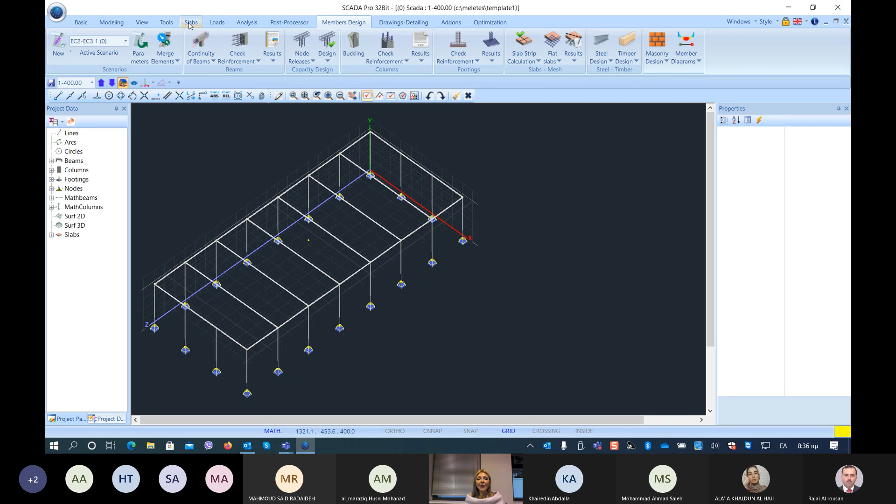In order to receive the reinforcement of the slabs, we absolutely need to have the strips. So I go to the slabs and check if I have the strips. You remember I have one-direction slabs, so I insert this strip in the Z direction. So I am ready. I go back to members design and now I open parameters.

Here you can see a window. There are a lot of tabs inside, but the most important thing is to select the combinations. You remember that I could have a lot of analyses, but the combinations tell me what results I will keep for my design.

In this case I will select the static combinations. You see here there is an error in the combination file - it's not an error, the software needs the seismic loads. So in case there are no seismic actions, you will see this message. In your case you don't care about this, so you just say okay, and you have the only one combination that you have for your exercise.

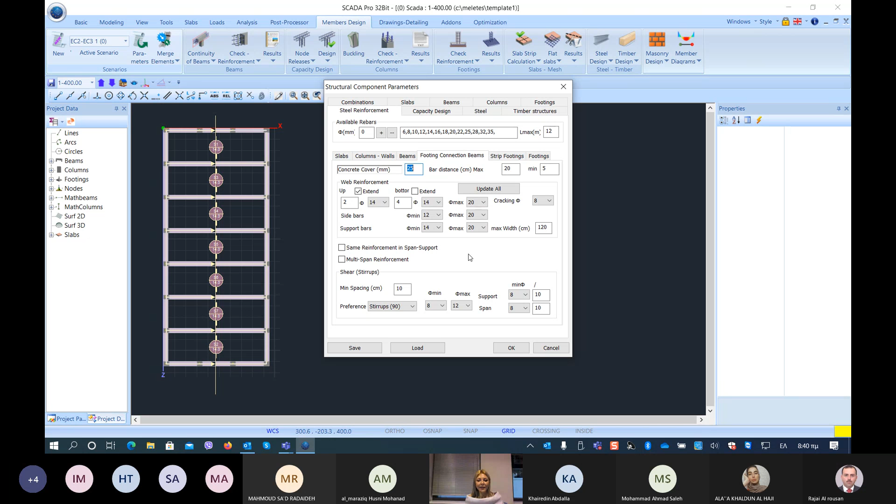So this is the selection of the bars that the program will calculate and insert inside the elements.

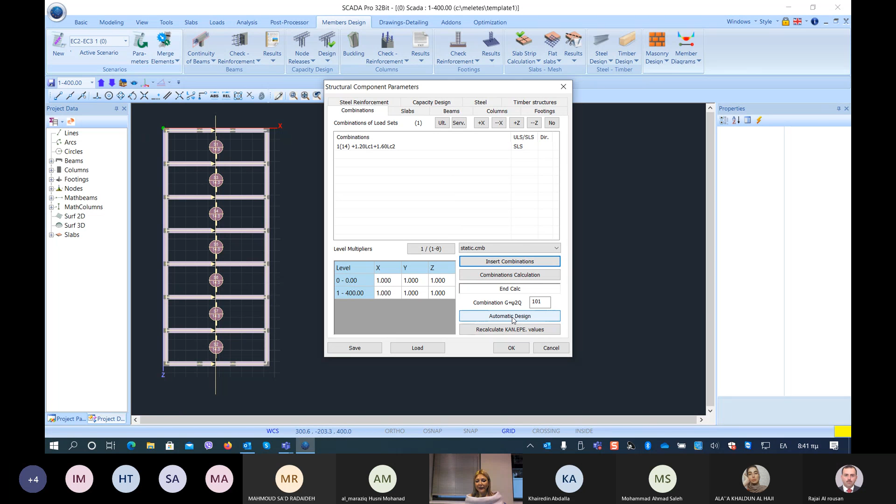So let's go back. For us, the important thing is to calculate the combinations, and then there is a magic command called automatic design. If I click automatic design, the software will do all the steps by default, by itself, without the need to do these things manually. So I can click automatic design, or I can come here and do all the steps manually. What are the steps that the command does with the automatic design?

The first thing is to find the continuity of the beams. What is continuity? This is a beam, but here there is a continuous beam, so the reinforcement should consider this continuity. That's why I need to say overall continuity of beams for this level or for all the construction, but I have only one level, so it's okay to click here. You will receive this square design in red that tells you these are the continuity.

After this, it's possible to do the check reinforcement. Otherwise, if I click check reinforcement without the continuity, the software will give me a warning. So continuity is the first thing, reinforcement check the second. Single or overall, I will select overall for the level and click OK.

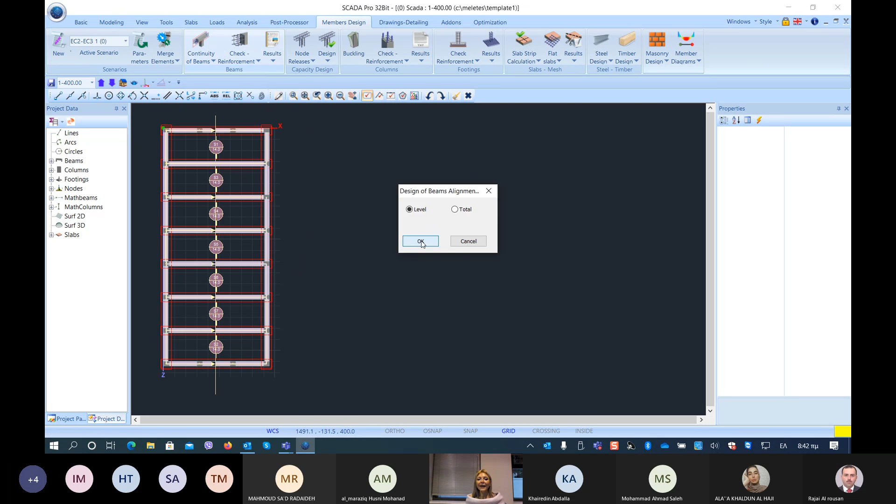And now you see the software doing all the calculations according to Eurocode 2 in order to insert the reinforcement inside the beams, and it gives me the information in color. So when I see green or blue for the beams, I am happy because this means all the checks are passed, are okay, and the software could find an appropriate reinforcement to insert inside the beams.

But let me show you what the software did. I go on the results and I can see results, exploration. Let me click results and I click inside the member of the beam, and now you see the results in order of calculations. As you see here, it calculates the reinforcement.

This is the required reinforcement, and this is the final reinforcement. So these are all the things written, and you see the bars that it used, and also here you can see the calculations.

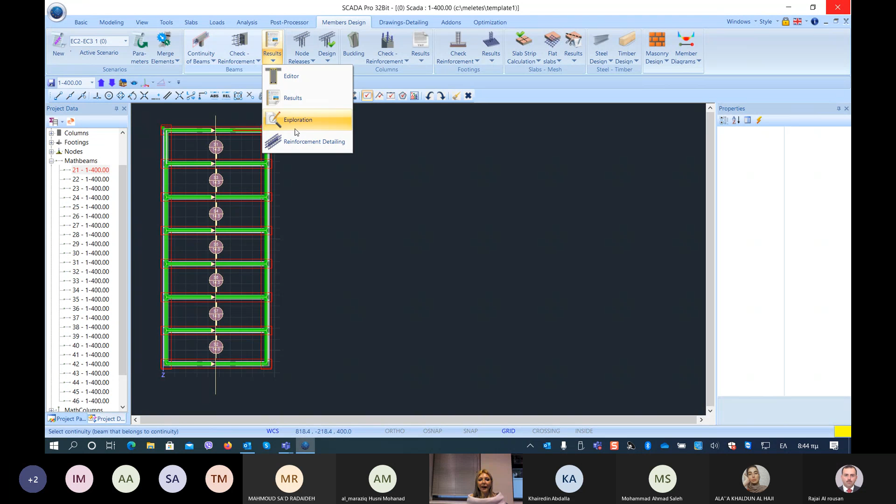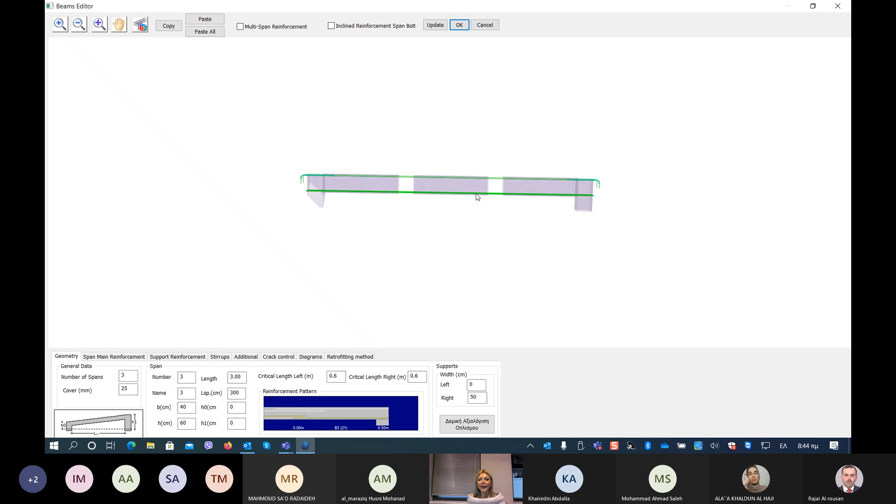But if I go into the reinforcement detailing and click on this mathematical element, I will see the reinforcement inside this continuity of beams. So here I can also have the opportunity to see it this way, how the reinforcement is inside, and I can see it also in the 2D view, and you see the reinforcement inside.

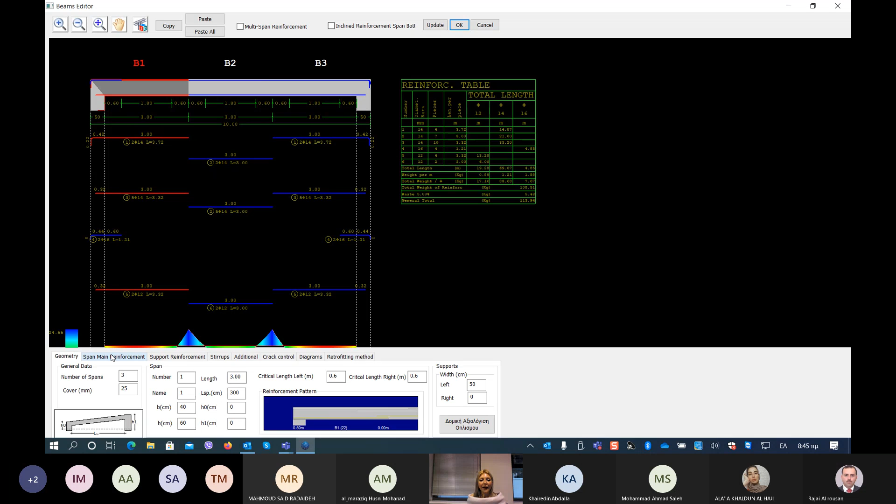So here it's something that I can manage. For example, I click here in this span, and if I click to see inside the span, I see the software inserts 2 bars with diameter 16 for the top and 12 for the bottom part.

It calculates, you see the anchorage here, according to Eurocode 2. So according to the bar, according to whether the reinforcement is top or bottom, it calculates the length of the anchorage.

And here you can see the required reinforcement in meter square, in centimeter square, and the placed one.

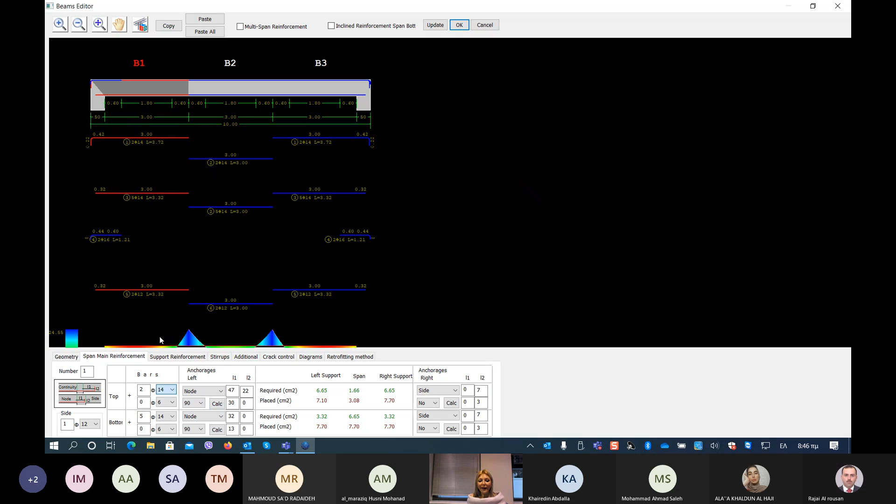And if I select, for example, two bars of diameter 12, you will see here that it becomes red because the placed is less than the required. So you see here that the software found the diameter that needs to be inserted in order to have this placed centimeter square more than the required.

And this is for the main reinforcement, and you can see also for the support reinforcement. So if I click here, I see that I have two more bars of 16 diameter that were necessary for this support part. And the same thing on the other side, if I click here, it becomes red, and now I see this part.

And this is how it works. I can see also the stirrups, and the stirrups are in the bottom. So here you can see also the details of the reinforcement. You see the bars in the bottom, on the top, and you see the stirrups around.

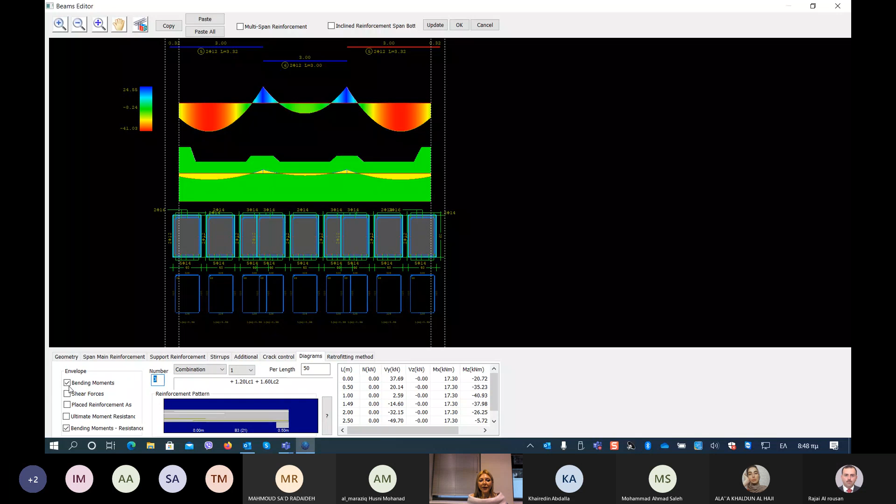And also here you can see the diagrams. So if I come here on the diagrams, I can select to see the bending moments, the shear forces. I can see, for example, the placed reinforcement and the ultimate moments, for example.

So I have the opportunity to check all the diagrams of the envelope. In this case, you have only one combination, so the envelope is the same as combination one. Otherwise, I could select another combination, or you can see it by load cases. So you have the dead and the live loads, so you can select to see for the live loads only. And here you can see that for each cut, it's like cutting the beam every 50 centimeters, and you see for each cut what is the shear, the moment for only the live loads, for the dead loads, or for the combination of them. So this is how it works.

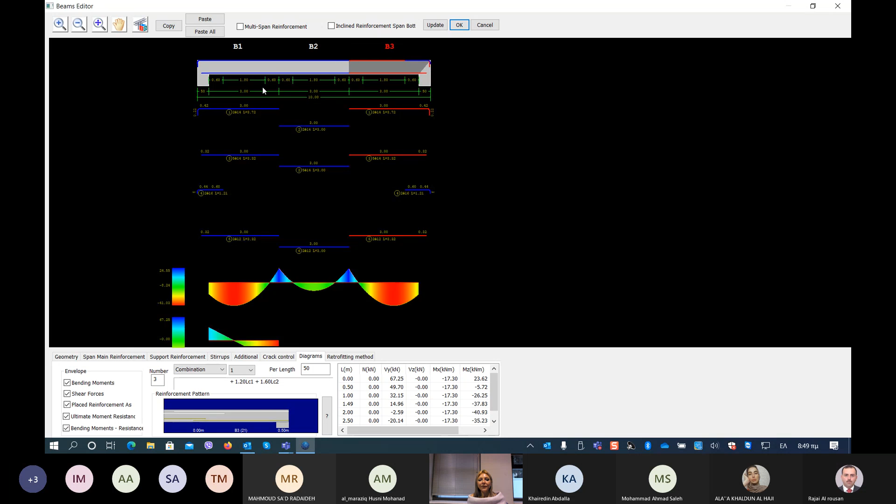And also I would like to show you that you have the possibility to click multi-span reinforcement. In this case, the software considers only one bar to cover all the needs of the continuity of the beam. Otherwise, you see that I have pieces of bars. In this case, I have one only bar for all the continuity. So this is also what you will receive in the designs.

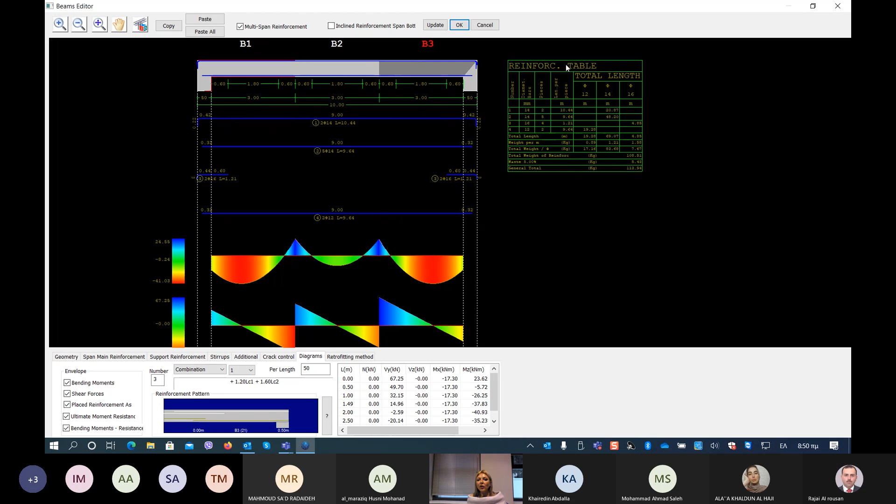Here you can see also that there is a table. Let me make it a little bit bigger. There is a table that contains all the information of the reinforcement of the beams.

And the most important thing is that if I change something, this changes accordingly. So if I select, for example, to have another diameter, you see here it's automatically considered here. So these are the information that you can take inside this editor, this reinforcement editor.

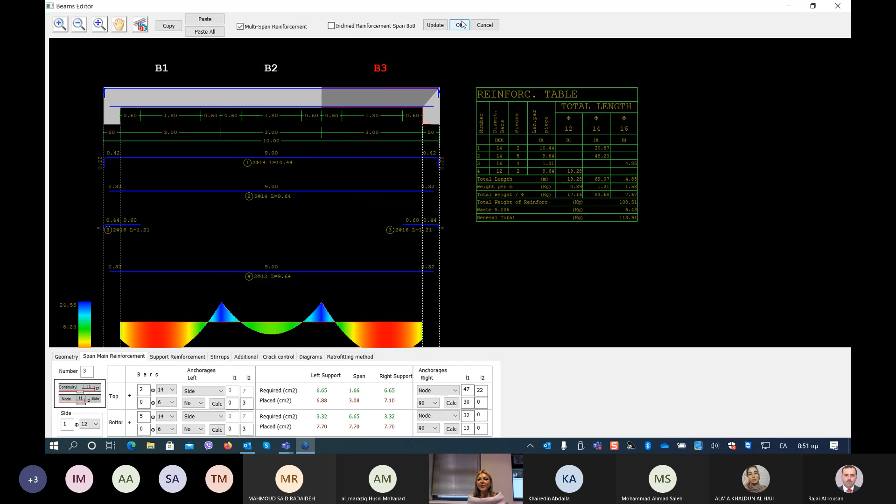I click OK in order to keep the changes, or I can just click cancel in order to leave what I had previously. And you can do it by clicking here on reinforcement detailing, or you can just come here near with the mouse, right click, and here you can see the detailing.

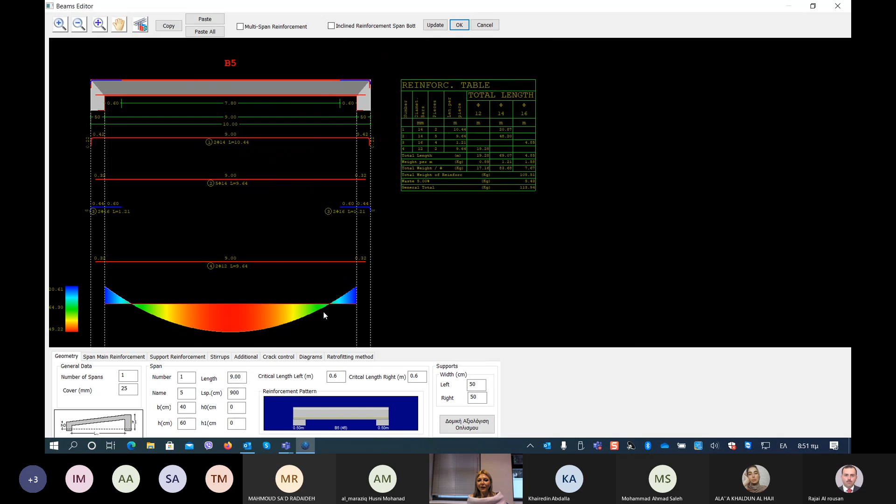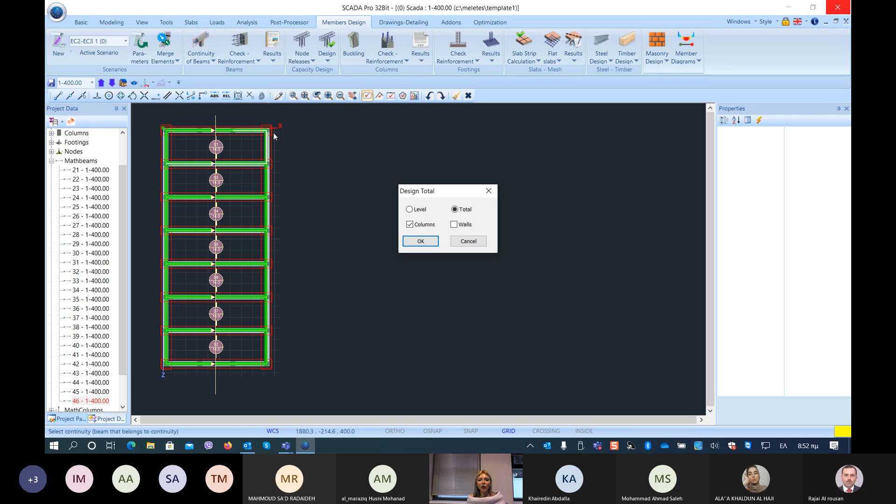Let's go on with the columns checks. So I click here, overall, and here I see I can do the check per level, for all the structure. I can check columns and walls. Walls means that there are vertical elements like columns where the ratio between one direction and the other is more than 4. So in this case, I don't have walls because there are only 30 by 30 columns, and I click OK.

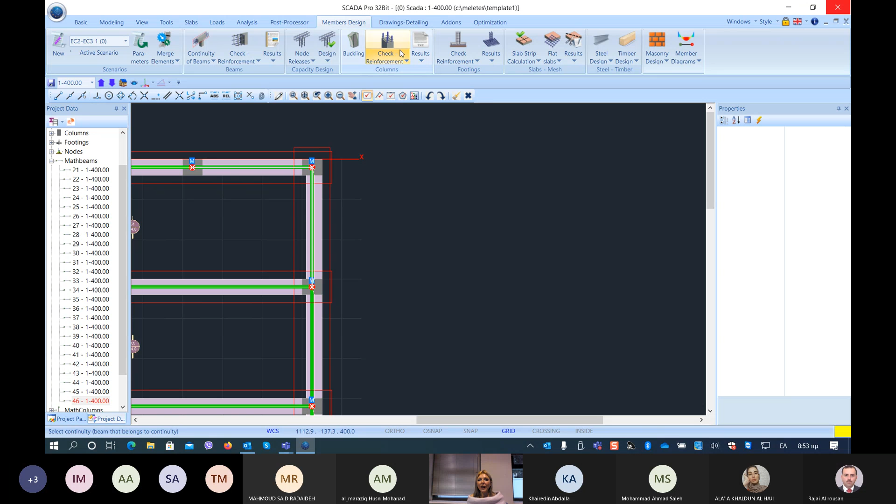And you see here that I have a lot of problems on my columns. Let me show you this thing. Why do I have these problems? I need to go check inside this column. So let me open the results, open this one, and check.

I have a problem because I need to run again. No, I have zero, that's why I have this problem. So let me go back to the analysis, because talking about things, maybe I need to run the static analysis again. I don't remember, I didn't run the analysis previously, so I need to run the analysis.

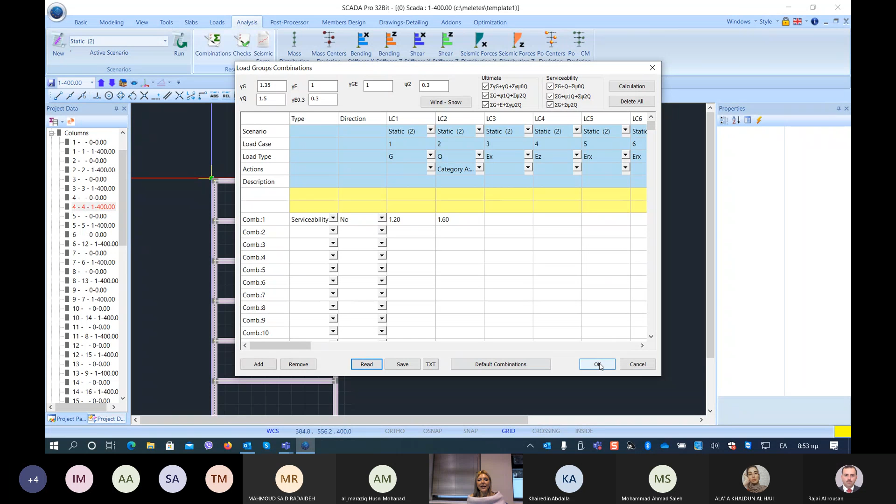Exit. I check the combinations again. So I remember that I had this one. Let me check this one. This is my... OK, and say not serviceability. Let's put it ultimate. OK.

Let me save it as static. Yes. And just go back here and I will do the checks again. So let me do overall, OK. And now I will check also the columns after it finished.

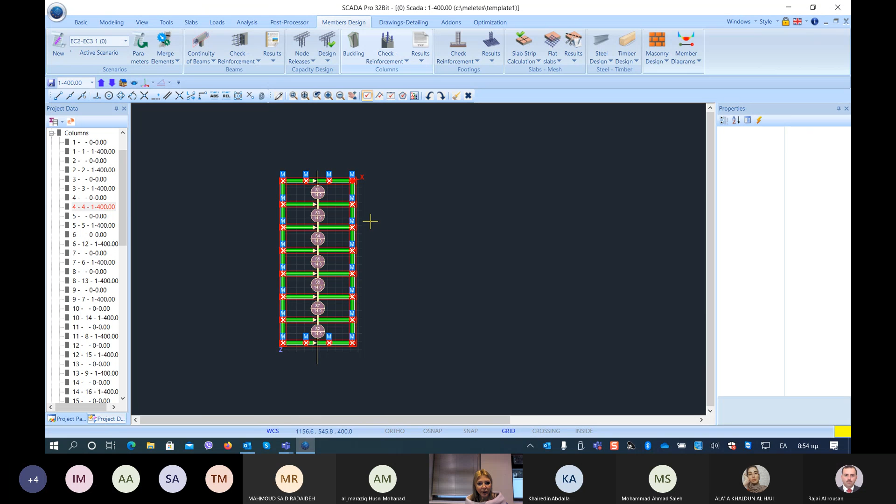You need to wait until it finished in order not to have problems. No, I still have these problems. I need to check it out. Let me see why.

Okay, I see that I have a nice reinforcement here, but I want to check the checks too. So, results. It's something here that I don't like, because I see that it doesn't calculate properly, it only calculates the minimum of the reinforcement that the norm decides. So let me go back to make some checks. That's why I see all these problems. Let me check the loads. I think everything is okay. Let me check the model.

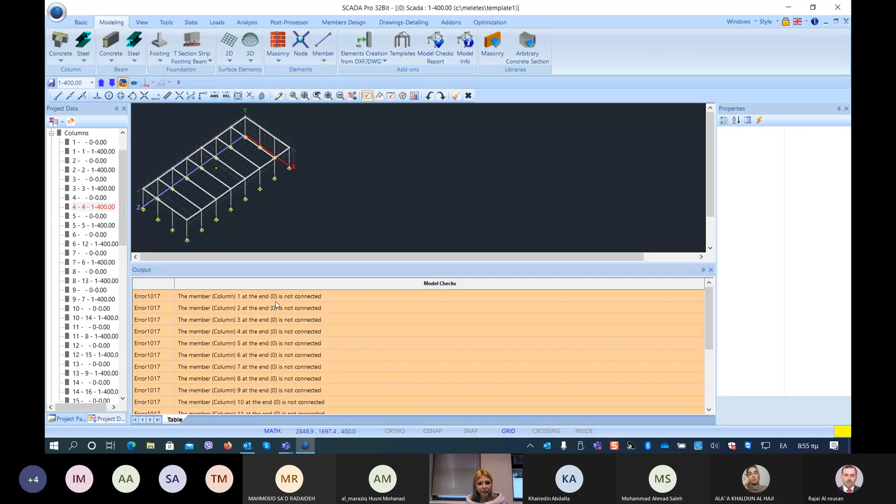Okay, this is only a warning because I don't have the connection beams. I don't care. Let me check again here in static. I want to check that I have the dead and live loads that will be considered one time each, and it's okay, exit, and I will run again, execute, exit.

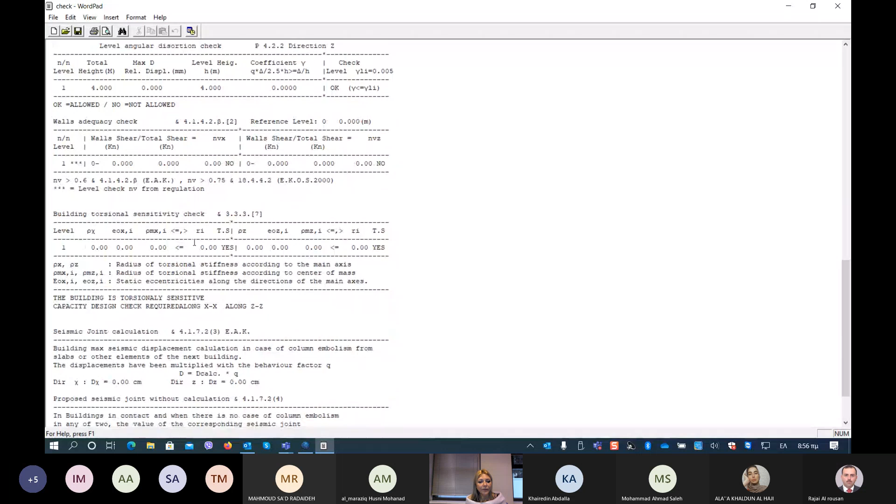I already have the combinations, okay, and I will also read the checks here because I want to see. Okay, I have... no, I don't have any kind of deformation. This is something that I don't like.

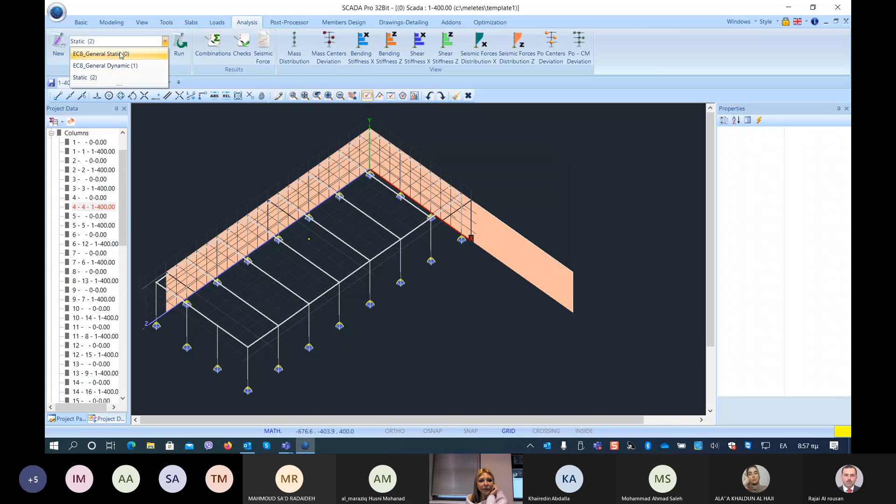So let me do the check again. I will do a general static analysis, and I will consider only this, so let me do this. I will run the... that's why I did this. So I initialize data and I run again the Eurocode analysis, not only one static.

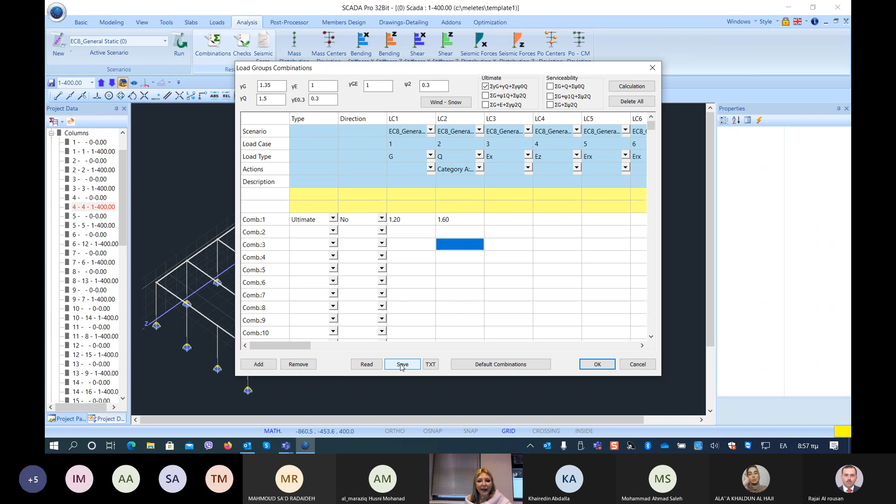So I will run the Eurocode analysis, but I will consider only the combination that you want. So I will uncheck all the seismic combinations, and I will do the calculation and receive only this one. If I could remember, it was 1.2 — correct me if I am not right — and 1.6. I think that was the combination that we will use, and I will write save, and replace this one, and let me say okay.

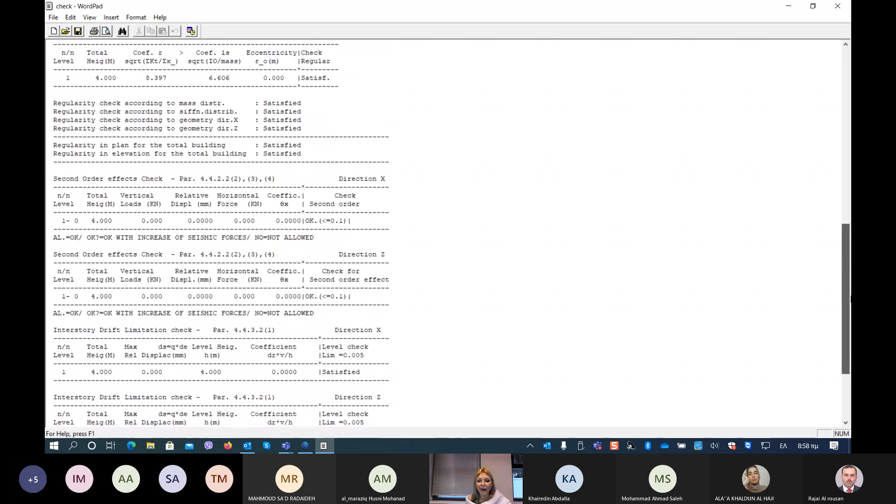So now I have the same thing that I did with the static, but it is according to the Eurocode. Let me check if that was the problem from the software, because it needs to have the Eurocode. Let me check here that I have no... okay, let me just take a look, and I hope...

That it would be good. Otherwise, you will have a little patience in order to check what happened. So that was the combination.

Okay, and let me do the automatic design in order not to make the same steps every time. Let me check now. Okay, okay, now I am good.

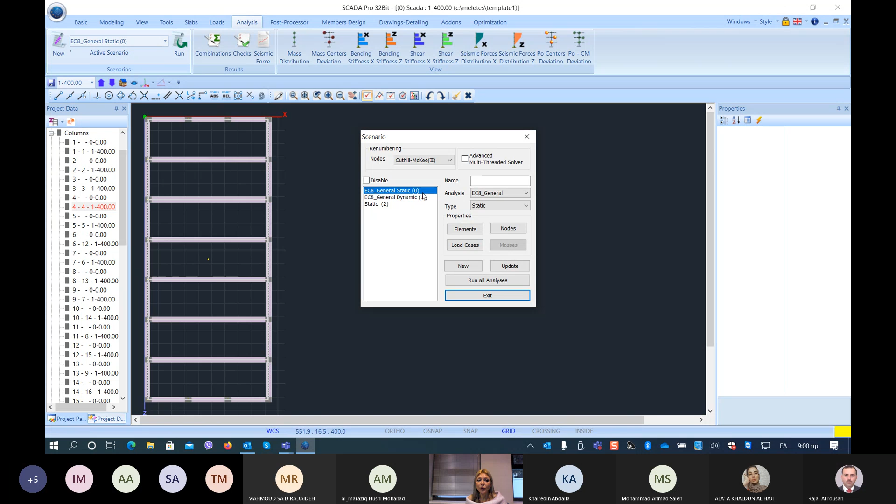So, okay, I explained that the thing is that I was according to Eurocode, so the software needs a regulation in order to go on, okay? That's why I didn't use the combination, the Eurocode analysis. I had only one static analysis and it couldn't go on. So I explained again, to do this thing or to create a static scenario with only dead and live loads, when my combinations consider only the dead and live loads, is exactly the same thing. The only thing is that here I am according to a norm, okay? So please consider doing these scenarios and not only a simple static one.

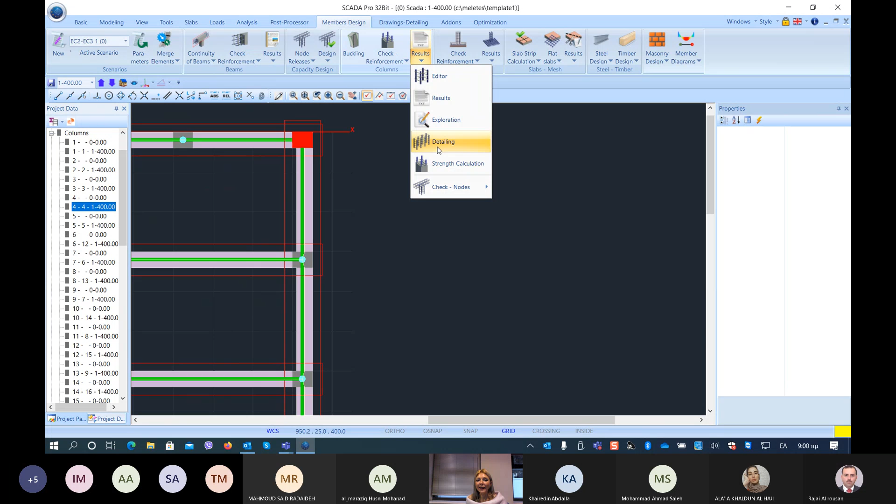So when I come here in members design, I go according to Eurocode again. And now, as you can see, I can go inside this. I can do results here, okay? And I can select to see the detailing. So I can click this and it opens the detailing. Otherwise, I can just come here, right click, and see again the detailing. So let me check here.

You see that in the main reinforcement, I have 3 bars of 18 in this part and 2 others in this part, and here are the stirrups. You see the distance between the stirrups, and you can also take a look inside the column.

Oh, I'm sorry for this, let me open it again. Just a second. It's cold outside, that's why maybe also the software has some cold problems.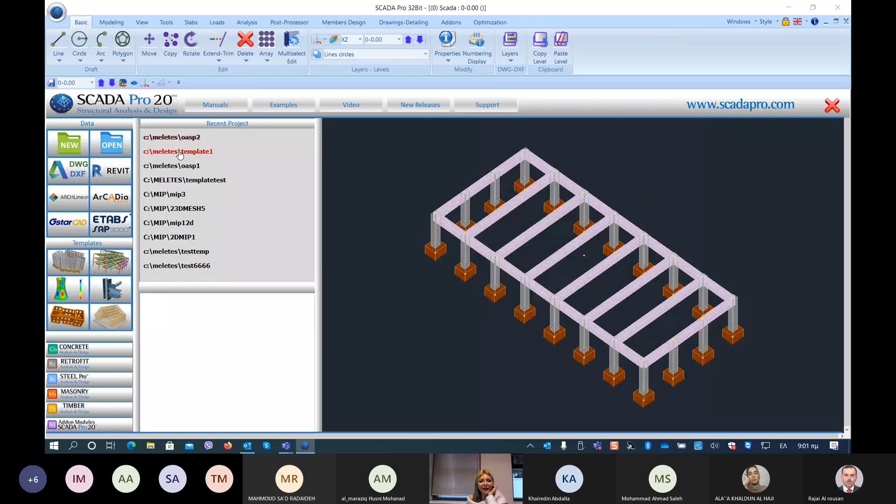So let me go here. Okay, we were here in members design, so here we are, and let's open again the detailing. And here I talked to you about this, I will try to do this again. Yes, here we are. So I can see also the stirrups, how they are inside the column.

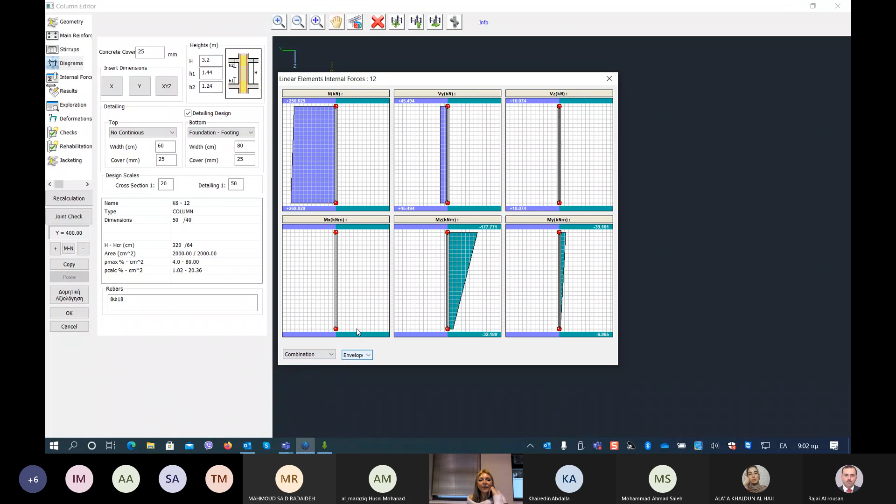So I close this. You can see also the diagrams. Okay, you can always select to see by combination or by load case. So the first and the second load case, or the combination, okay?

And also here you can see, you can receive the internal forces. The same thing that I told you for the beams. You can cut the column in pieces, each one has 50 centimeters. You can also change it if you like — you can type, for example, 1 meter.

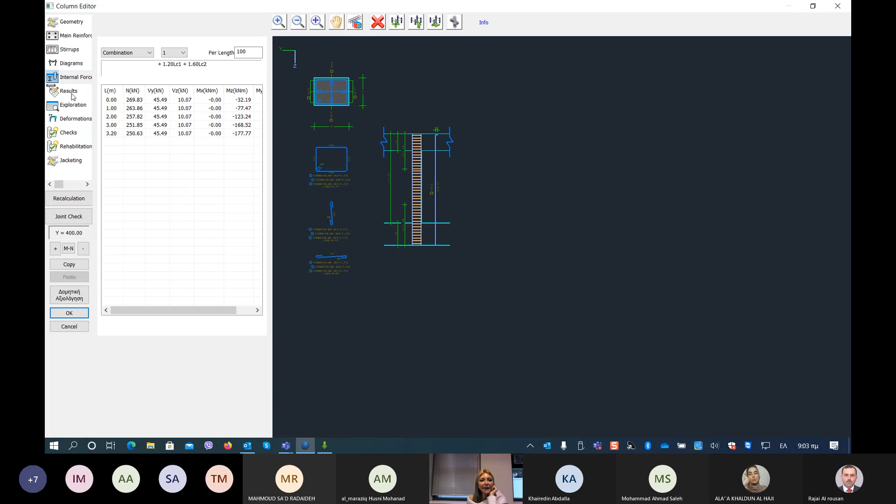So in this case, when you select the combination, you can see it for each 1 meter. So you can check the value of the moment and shear, etc. And here you also have the possibility to check the results. You see here I have all the results that I need, so I can see the shear forces, the axial forces, I can see the moment here, and you can see it in bottom, in top, and of course in the 2 directions.

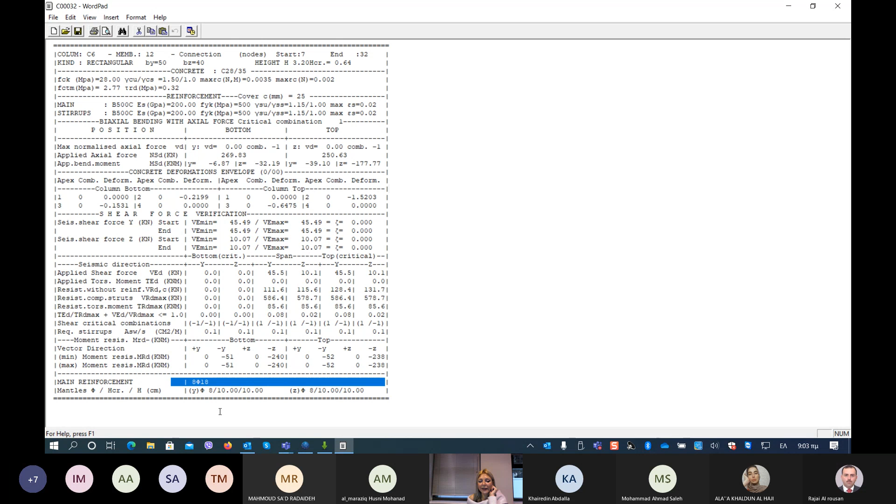And here you can see also the reinforcement inside the element. So even here you can do the changes that you like. I have the possibility to, for example, say that I don't want to have 18 millimeters in the corner. I can change it.

I can add or edit bars. Let me show you this. I can do it by right click. I can decide to have another bar. So if I click here, I have a 16 now. I can edit bars, select here and change for all of them.

So I can change all of them in the corner, or I can add bars. For example, I can say here the distance that I want between the bars, or I can just click add a bar. I can add it, yes, I have 0 here.

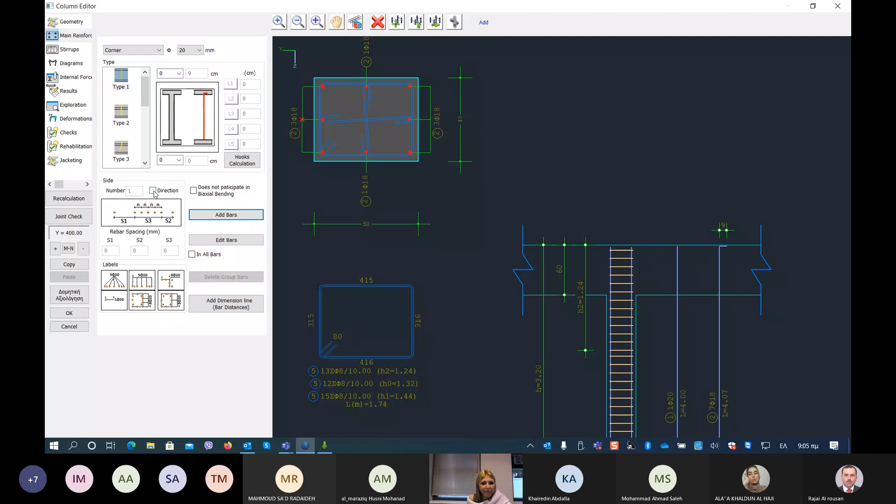So I can add a bar between, let me select. I can add it between, add between here. Why did it tell me this? Stirrups, a main reinforcement. I click 1. Edit, no, I click 1. Add, I already, yes, okay.

I put a lot of them here. I already have one here, so that's why I cannot - yes, I have another one down from this. So that's why I cannot add, or I can insert side, okay? I cannot put here because I am in the corner, but I can add a side one. So now this opens, okay?

And I can add one between this and this, so I have a sidebar, okay? So I couldn't insert because in the corner I already had one, but on the side I can decide to put other bars, so add also another one between this one.

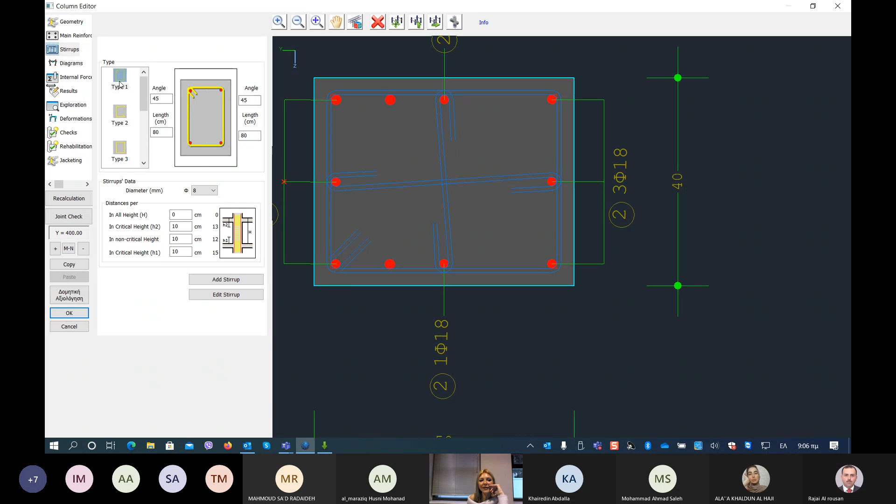And after this, I can also insert stirrups. I can decide the type of stirrup I want to insert, and I can select this, or say add stirrup, and just click here, here, here, here, here, and add another stirrup, okay? Or I can delete one and keep only this.

So why do I show you this? Because the software gives you the opportunity not only to receive the reinforcement that the regulation needs, but gives the opportunity to change it. And this is very important when you work with existing buildings, because in existing buildings they already have the reinforcement inside, and this is how you manage to

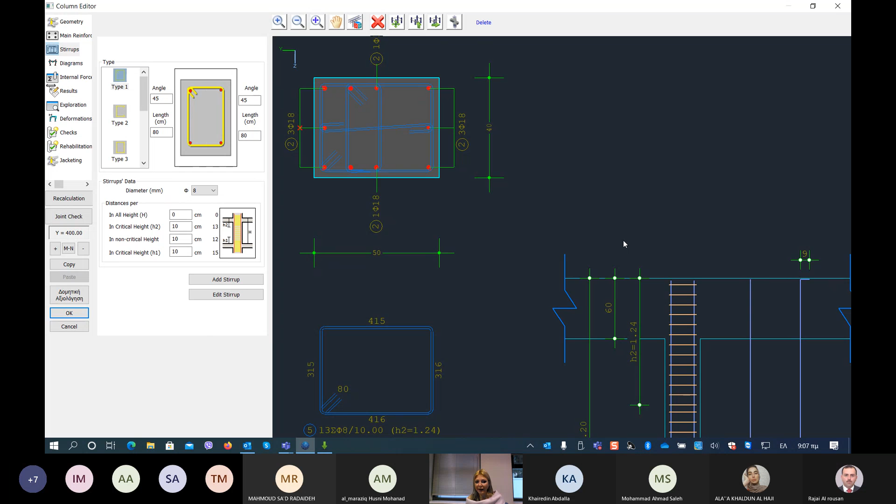insert the same reinforcement that you need to have in order to check an existing building. So cancel, and the next one is to do the slab calculation. You see that I have the check - this is because I selected to do this automatic design in order to not lose time. So the software already made this check. So I have the check, and I can go inside the results and click editor.

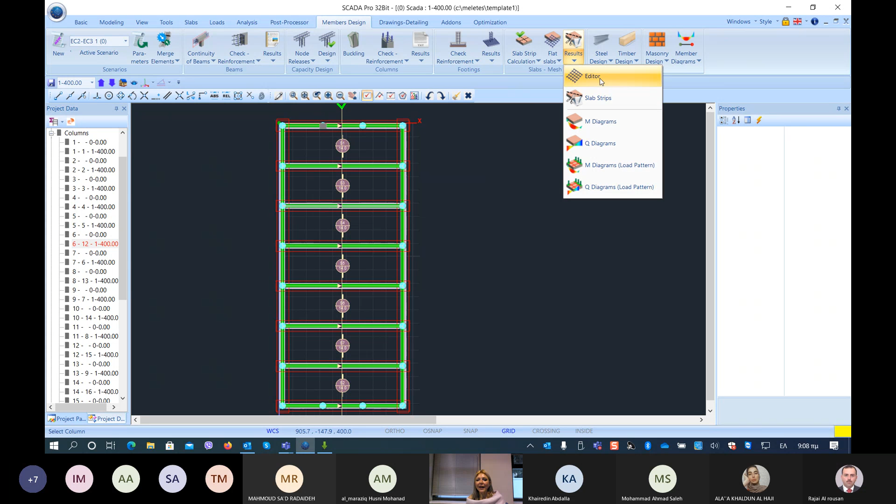And if I click editor and click on this strip, I will see in each span - I go to the next one, and the next one, and the next one, and the next one, until I arrive to the last one, and I see the reinforcement inside.

If I click here, I can change even the number or the diameter, and I can see the same thing here, the required and the placed. So if I come here and change, for example, I select 12, you will see here that it changes also the placed, and I have the required, but it changed the placed.

So cancel, and now when the checks are finished, okay, let me tell you this. In case that, for example, this beam had a problem - if it was very small and couldn't pass the moment checks or the shear checks, okay, I should work on this one. So the good thing is that you can just select the element that contains the problem, and change here some dimensions.

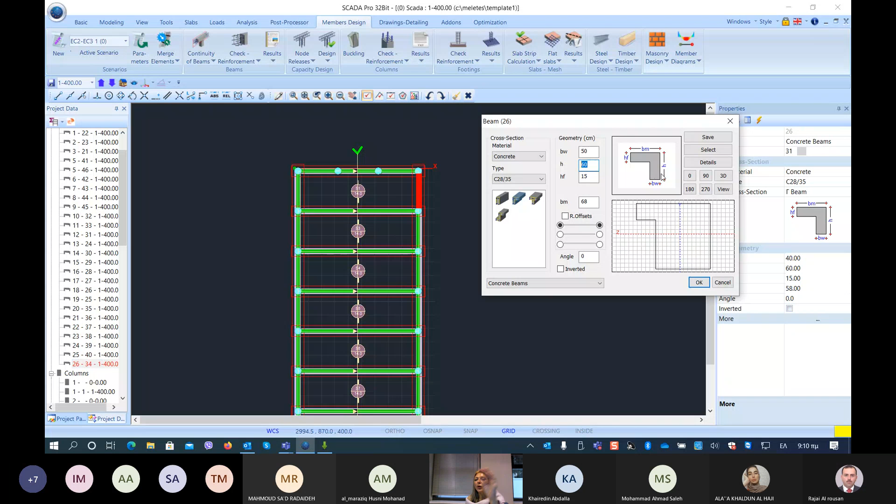For example, I need to make it more big, so I need to say, for example, that it could be 50, or I can change the height of the beam. So in those cases, I can make the changes. I click OK. I can do for only this element a single check.

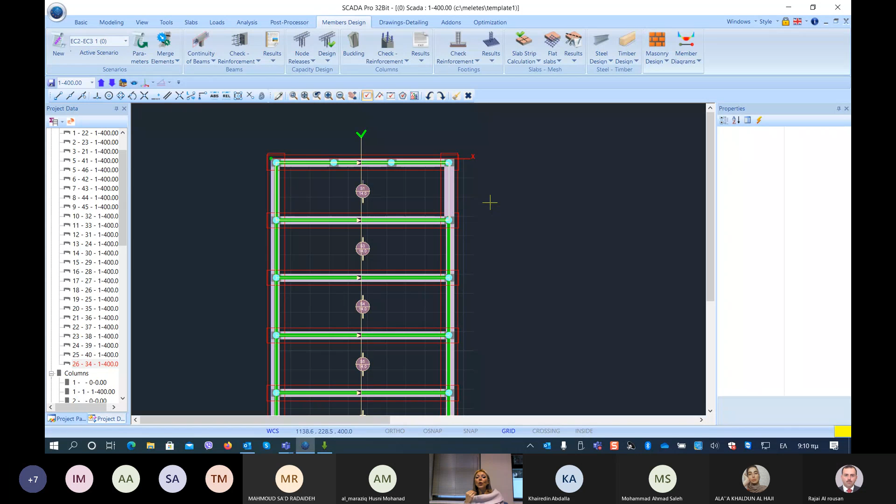Okay, if I see that now it's okay, so passed the problems, I know that I can keep this element, changing of element.

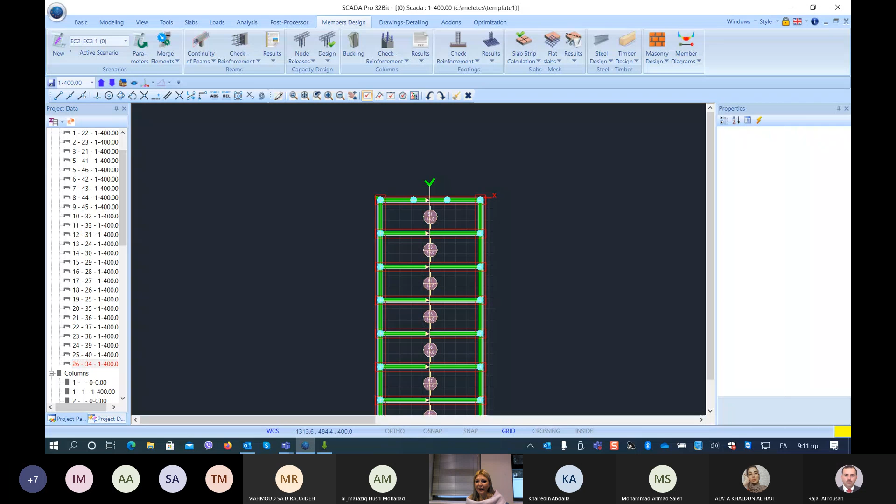Now what I need to do is go back on the analysis. I need to run the analysis again, so I will initialize data in order to consider this change, an automatic procedure, and then do the member design for all the elements, because if I change one part, I can do the check locally, but this influences the entire structure.

So I need to do the checks again for all the structure. Now the last thing is, when I did this, I have to go to the bottom and check also the footing reinforcement. Overall, I see the footing reinforcement checks, and here in the results I can also see the editor.

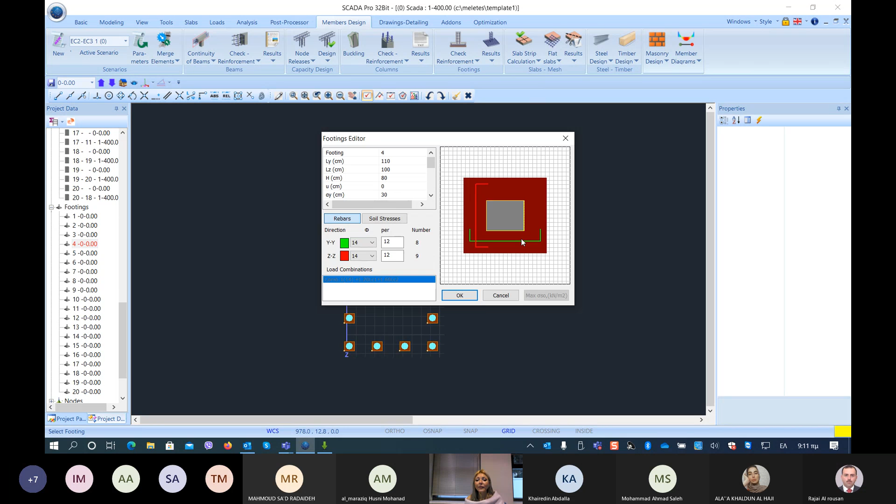This is another kind of editor, so I see here the footing, and the reinforcement in the Z direction and in the Y direction. I can also see the results, so I click here and it opens the results, so I can see the calculations inside the footing.

So I finished all the checks for all the elements of my structure. Everything is blue and green, and now I can save my project and go on to the drawings.

I open the drawings, and here I have import, import again, and the software automatically opens the name of my project, the current project, and tells me to find the level, to define the level that I want to open. So I just click one here, I have only one level, find.

It gives me the file that contains the designs. I click here and OK, and now here I have all the detailing and all the design that I need.

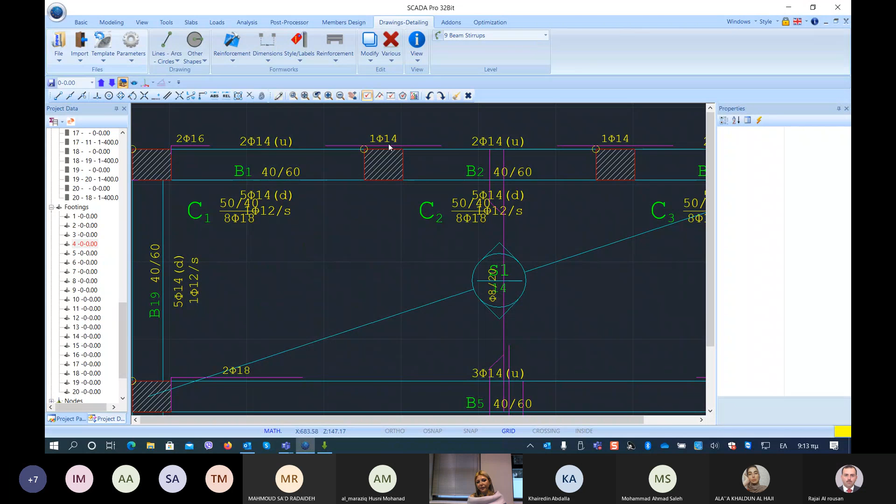So if I come here near, I can see the name of the beam with a number. I can see all the bars and the reinforcement, even the support reinforcement or the reinforcement of the entire beam.

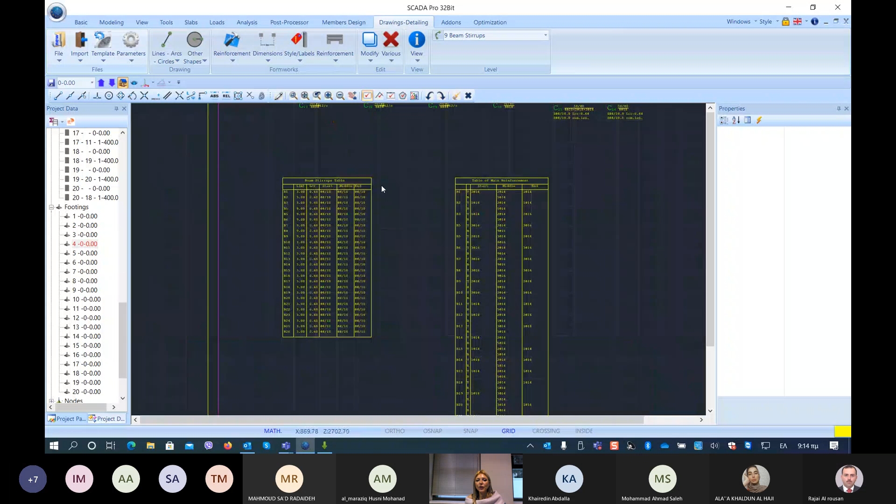I can see here also the reinforcement of the slabs, and here I can see the details of each column with a number. And here on the bottom I have also the two tables for the beam stirrups table and the main reinforcement table of the beams.

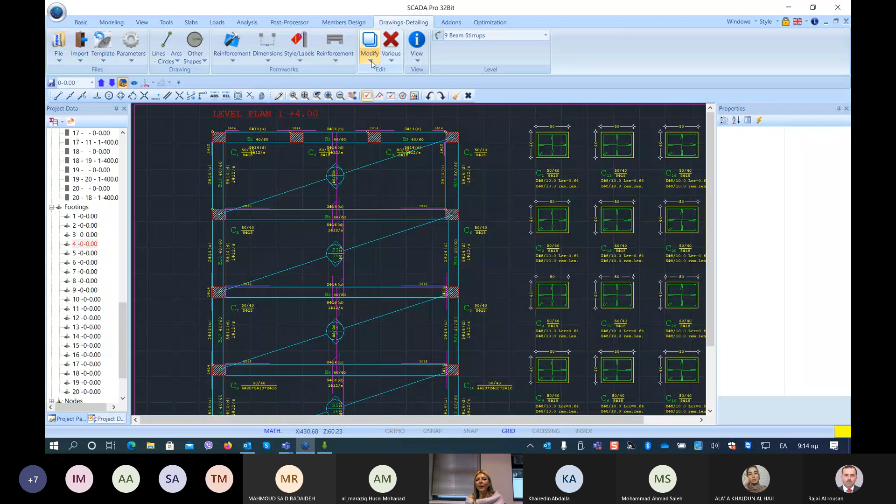This is a design that is editable. So here you have all the commands that give you the opportunity to move a little bit the text here in order not to have one text over the other, etc. You can do it here, working for example with edit.

You can mirror, copy, move, you can delete various things, you can trim, expand. So you have all the design commands here, or you can add, for example, dimensions, label styles.

Otherwise, if you don't want to do these things here but you want to work with the CAD software, because you have also your table and you need to manage it as you like, you can just export as a DWG or DXF file.

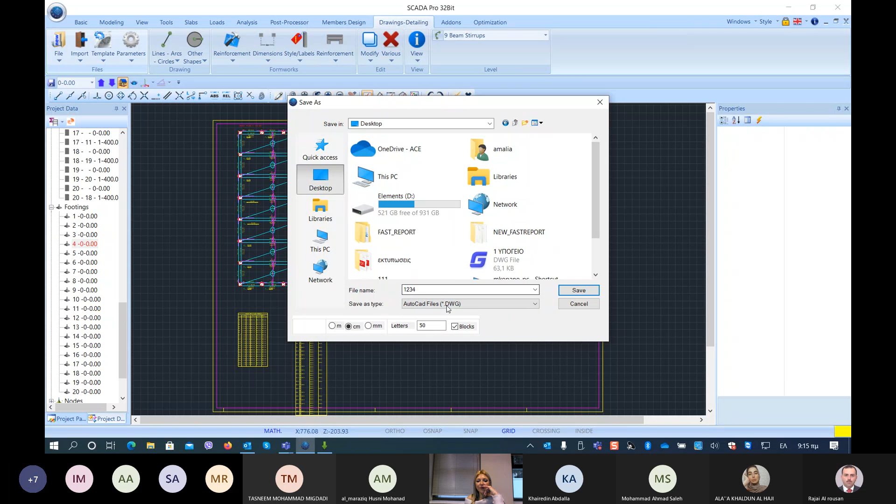So you just export, you give a name, 1, 2, 3, 4, okay, as a DXF or a DWG file, save, and now if I come here I will find this 1, 2, 3, 4. Where is it?

It was one. Okay, here it is. So if I click here, I open it with GstarCAD. It's a CAD software, and here I can see my drawing details and design.

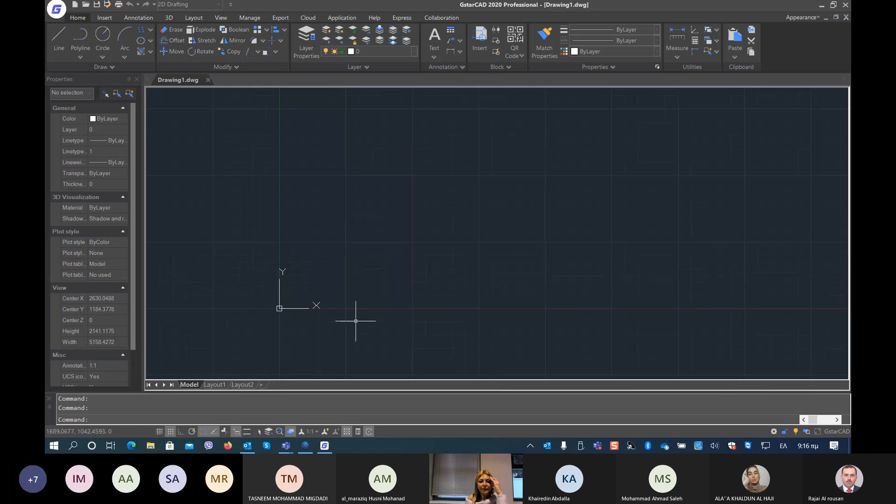And here it is, so now I can manage everything here. Okay, I can move it, I can work as I know how to work inside the CAD file.

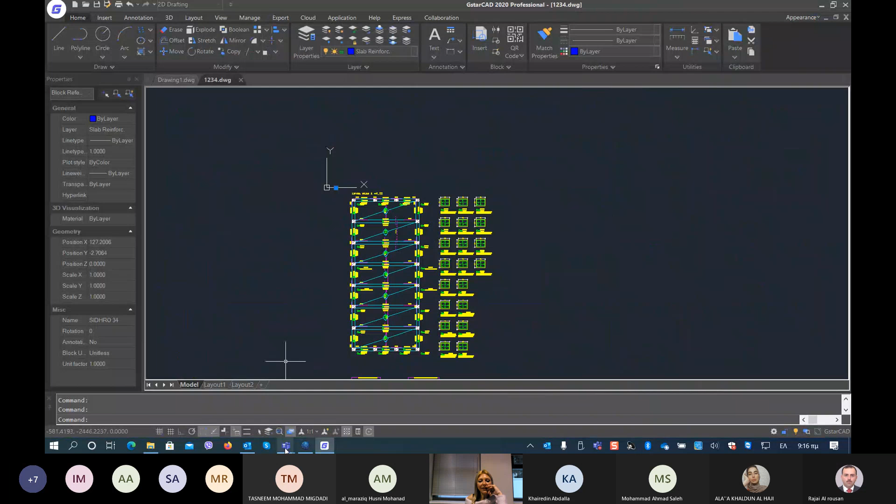The last thing, so I close this, I don't care to save it, and the last thing is to have the printouts. So here on the add-ons, the last command, of course before the optimization, is the printouts.

So here you can find all the available chapters, and you need to select from this, because here, as you see, there are chapters for timber, steel, masonry, so you don't care. But you can just decide to have a cover, a short description, and then you need to open inside, for example, here, the analysis that you run.

So here we work with Eurocode 8 general static, and you see that there are all the data that comes from all the calculations that the software made. So you can see, for example, the support reactions, you can have the load combination, you can have the checks, and also in the design you will have the slab checks, the column checks, and the beam checks.

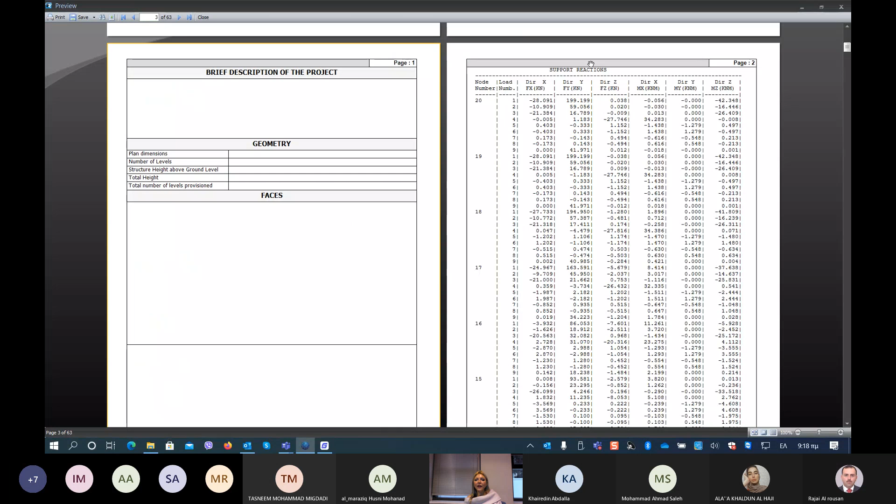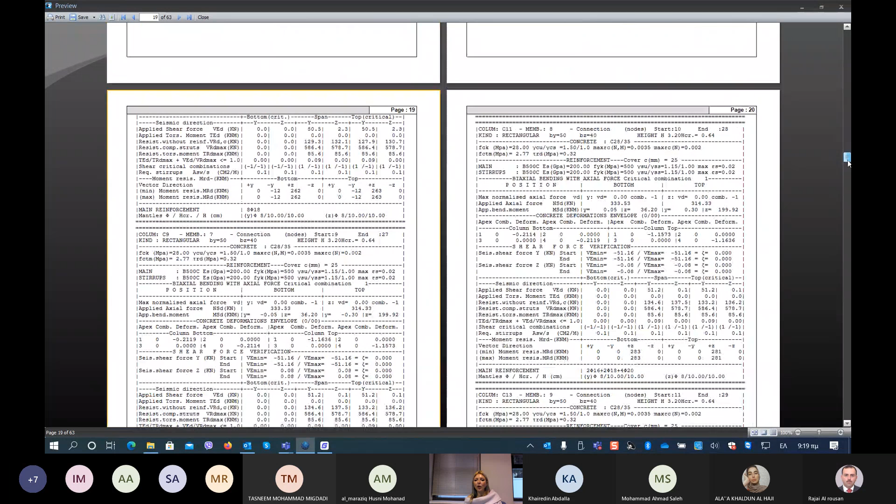Okay, here I can show you. You see there are the support reactions, and going down, here is the load combination that I used, then you see the checks for the analysis that I made, and then I start with the slab design, all the calculations for the slab, for the columns, and at the end you see for the beams with also the diagrams that we already saw. So you can print what you need.

You can also save it, as a doc file. So you can also manage it, so you can type here. Otherwise, let me close this.

Here there is the building data. So if you type inside this data, you will see in the cover, in the description, you will have all this data inside your printouts.

And you can also make, for example, a print screen, and keep your project. So you can select, say that this is an image that I want to save. I can save it and say, okay, let me go to the desktop.

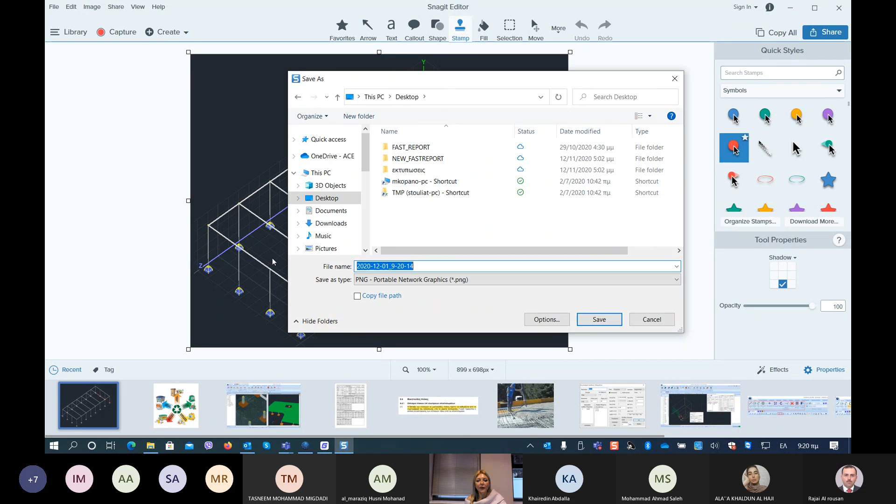Save, and now I can come here and I see, for example, here, building data. I type something like this, I don't care.

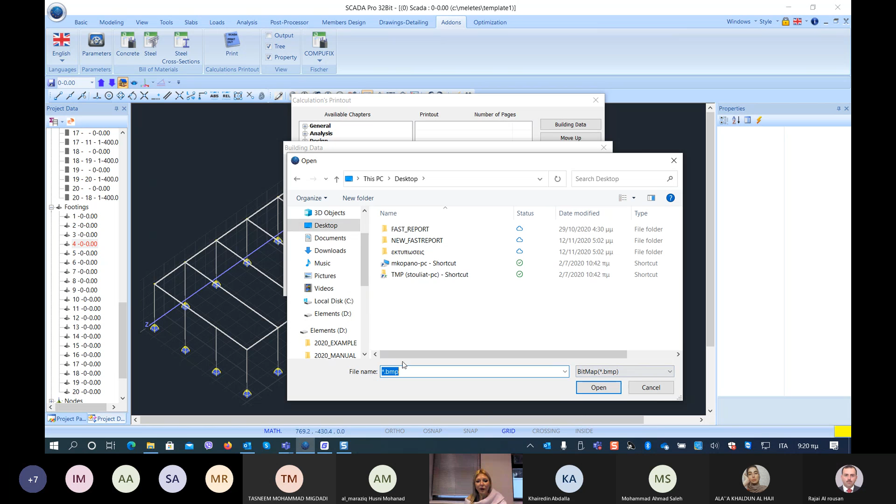Now you can also decide to insert a picture. So the desktop, did I save it? Okay, let me, BMP, I didn't save it as a BMP, so file, save as a BMP. Save, and let's go back here, and here it is, open, and okay, and now if I select, I will see this, what are they? No, what I miss.

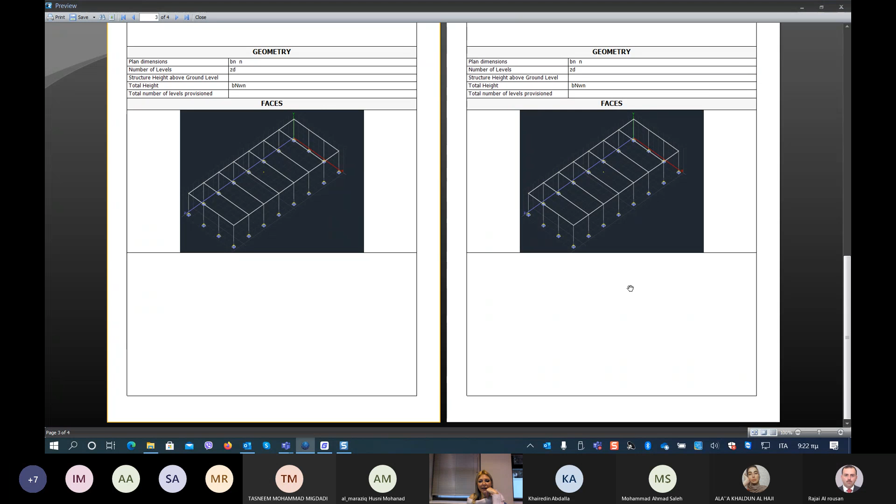I also need the picture, okay, report, short description, project. Here it is. So here in the short description, I can see all this data that I insert inside.

So here the project is finished. Okay, as you see, we have everything done, so I can print my designs, I can print my checkouts, and I can create my project. The last step that somebody could do is to do the optimization.

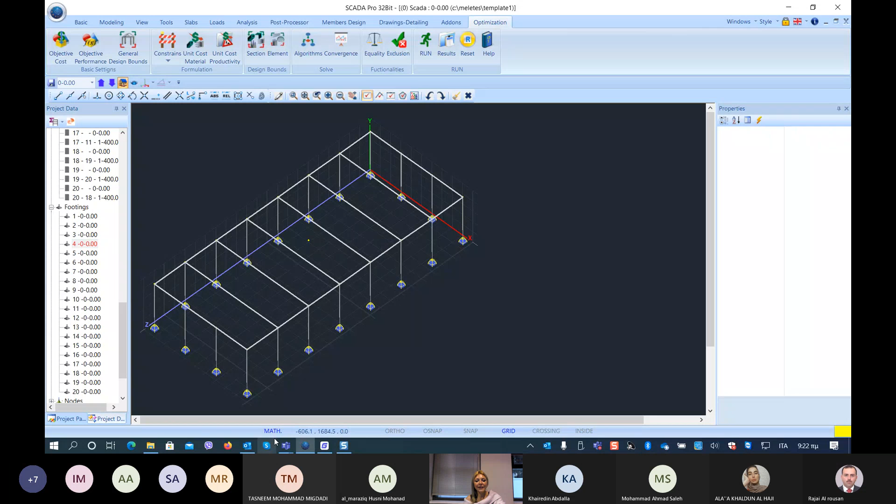This is something that is not necessary in order to create this building, but it's necessary in order to save money, because as you see here, I create this building by considering a beam that has these dimensions, but maybe I would not need so much concrete, because maybe for this building, for these loads, it would be necessary to have, for example, a beam with 50 here or 40 here, okay? But I couldn't know this because I passed the checks, everything is okay, and I couldn't know if I could reduce these dimensions.

So this is what the optimization does, okay? It gives me the opportunity to define the function according to what I want to make the reducing, and see at the end what would be the better project to have, okay? But this is another part for your project, it's not considering.

So I believe that we need to stop here, and your professors will decide if you want to make another lesson, maybe when the students finish this project, in order to see what happened after the optimization. Could we do the optimization and leave the program running and discuss about the student ability, if they understand or not? I think it will take around 10 minutes to make optimization. Okay, we can do this, of course.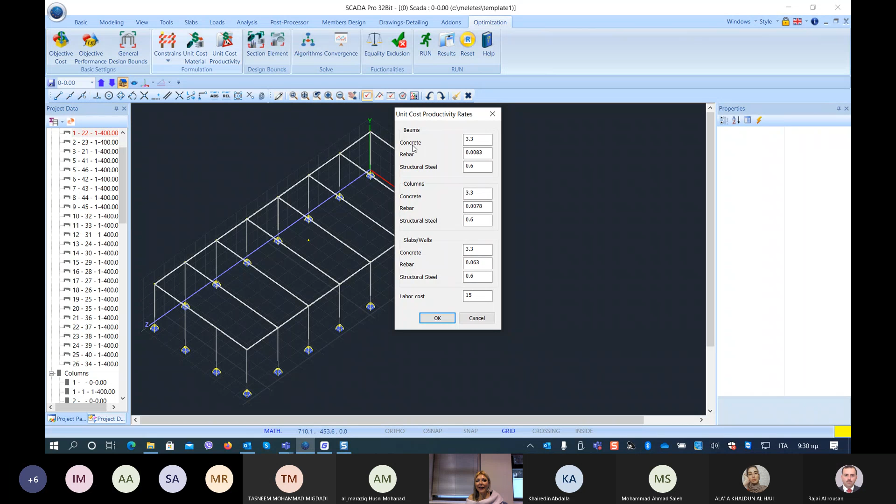And here I have the unit cost. Then I have the productivity cost, meaning in order to create a beam, what is the productivity cost in order to make a beam. So the concrete, the rebars, the structural steel, and also what is the labor cost per hour.

After this, I also have the possibility to make some bounds in some elements or in a category of elements. For example, if I click pick select and I click one column, let me show you this, and I open the list, you see that I have this column, and I can see that it has this initial dimension, and I define a lower and an upper one with a step of 5.

I can keep this, or I can lock it. For example, I don't want these columns to reduce or increase in this direction or in the other direction. This is how I can manage how it will work. And I can do it for columns, for beams, for slabs, and also I can do it by element, so not all the columns, but only one column, and I can select it.

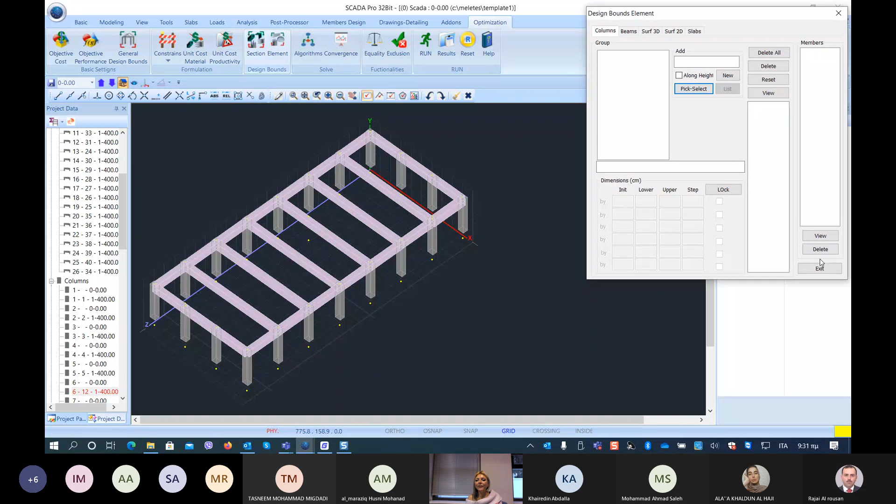So let me, here I am, sorry, optimization. And the next thing is to define the algorithm, as we see.

And now it starts the nice thing, because here I can select the analysis. So you see that we ran a lot of analyses. So we will keep the Eurocode 8 general static analysis. And for the design, I will keep the Eurocode 2. So when this increasing, reducing part happens, it will be considered according to the norms, so not something where I don't care about the checks of the norms, it considers the norms.

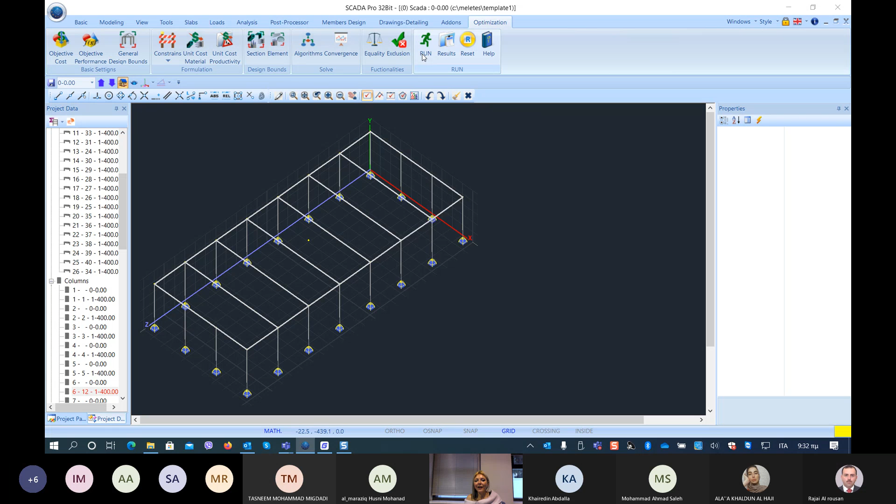So now I can run this optimization. So when I start here, let me explain now that I started, because I didn't want to talk a lot before I start to do this. As you see, what the software does now. Now the software runs the analysis, and now, as you see on my screen, it starts.

The first step that it did is increasing all the elements by 30%. You see, they became big. The second step is to reduce them by 30%. The third step is my project, the step of the project as it is. And now after this third step it starts to do the optimization. Now you see, some of them are small, some of them are big.

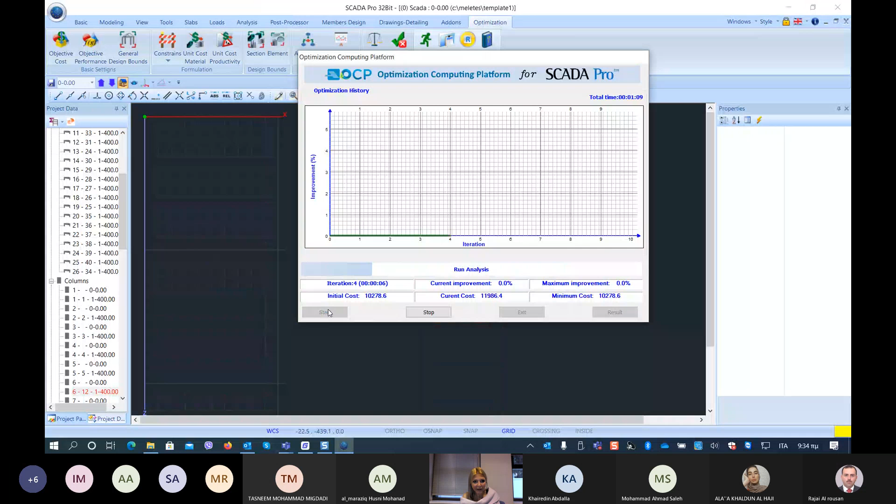It starts to do all the iterations, in order to receive the perfect way. So I stop talking now, because now the software does everything. Please take the command now, and I will wait with you, and we will talk later.

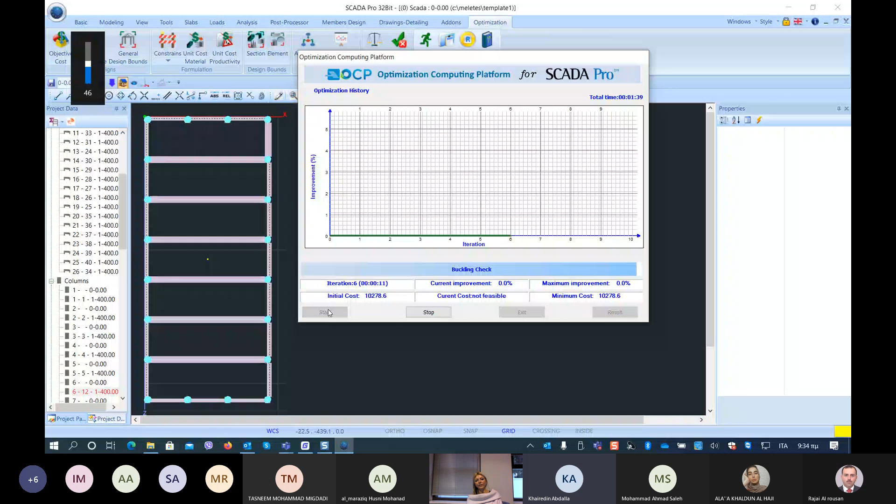Dr. Rajai, what are you thinking? Yeah, tell your students please about reinforcement, or if you have any problems with the distribution of the reinforcement, the dimensions.

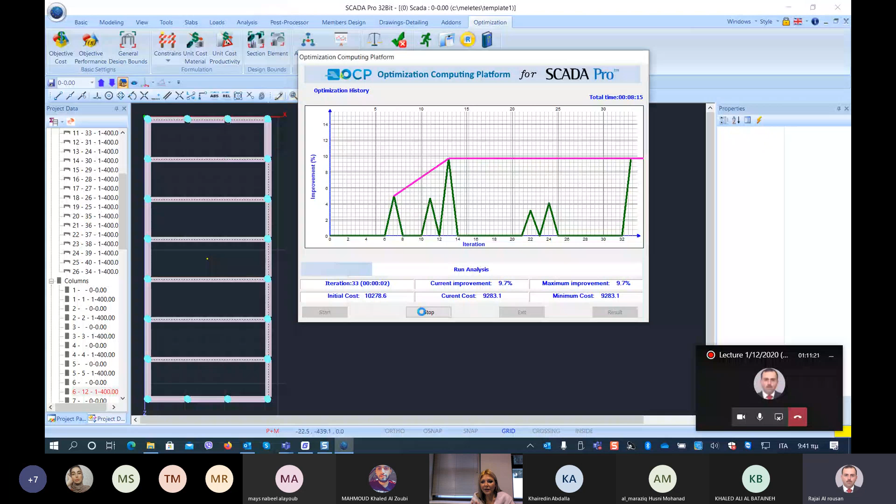Thank you, Amalia. Just one second, I want to show you the results. If I click stop now... let me, it finished. Fantastic, so I click stop. No, I need to finish one iteration in order to click stop. So just a second. I don't want to lose it, so stop. And I can stop it here and see until now, the results.

So I can click here and see the first step. I told you it was 30% more, 30% less, my initial, and then I started to have a zero improvement, but here I have also the failure degrees. In this step I didn't have a big reduction, because you see here the initial cost. In my first step I had more cost, but the checks are good. More cost, the checks are good. More cost, not the checks good. Less cost, nice checks. So this is what you can read here. Until here I had the best one, it was the 34th step. I had my best solution.

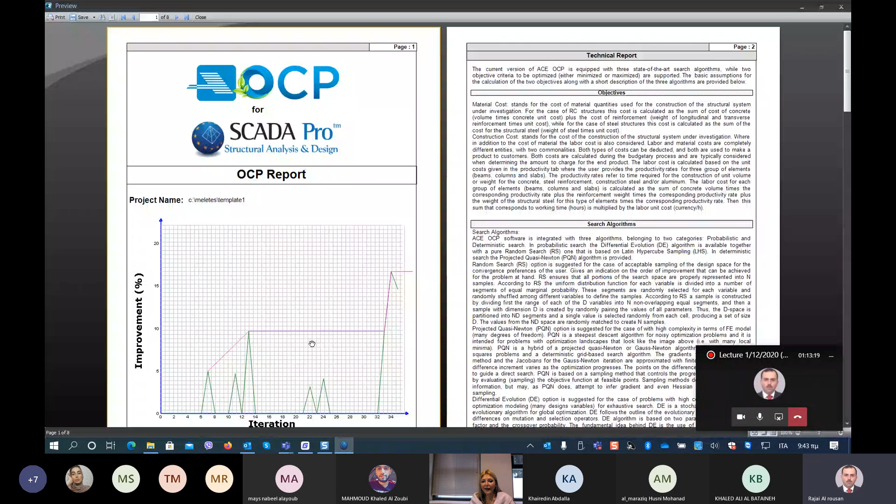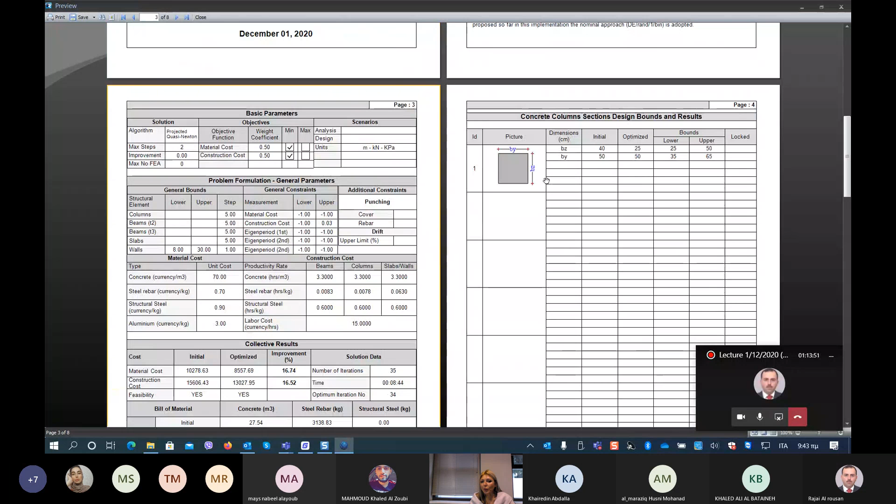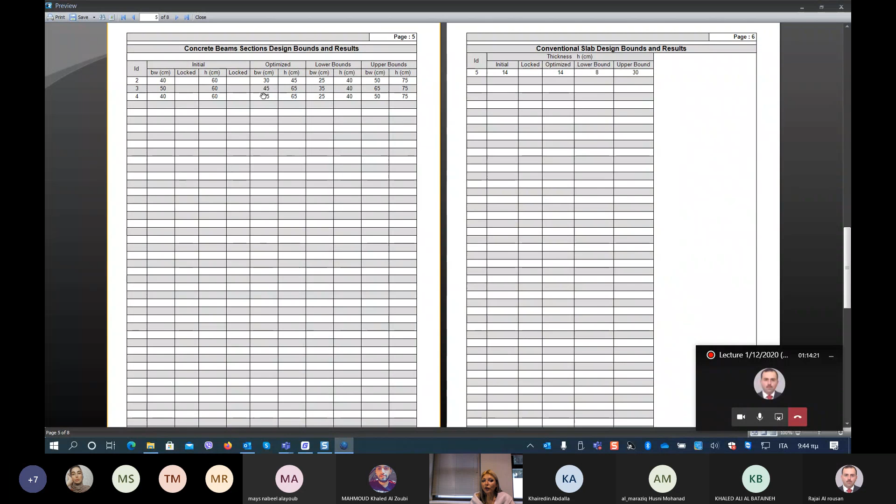In some cases, this is what I wanted to show you: I needed to make them bigger in one direction and smaller in another direction, for example, in order to have the better solution for all the building. Now I close the results, and if I go, this is the 35 steps. So I exit.

Okay, and I have my construction. I didn't lose it, this is important, okay? I made the improvement, but this is my initial one. If I want to find the improvement one, I will go to check inside.

My project, so it's template 1. Let me find it, template 1. And here in the OCP file folder, I will find all the run files. So you see here, it keeps a file for each step. It's important to say that this file contains the modeling. I need to do the analysis and the design again, and this is because otherwise it would be very hard for the softwares to keep all this information, and it's not good for my local disk. So I can find this one, okay?

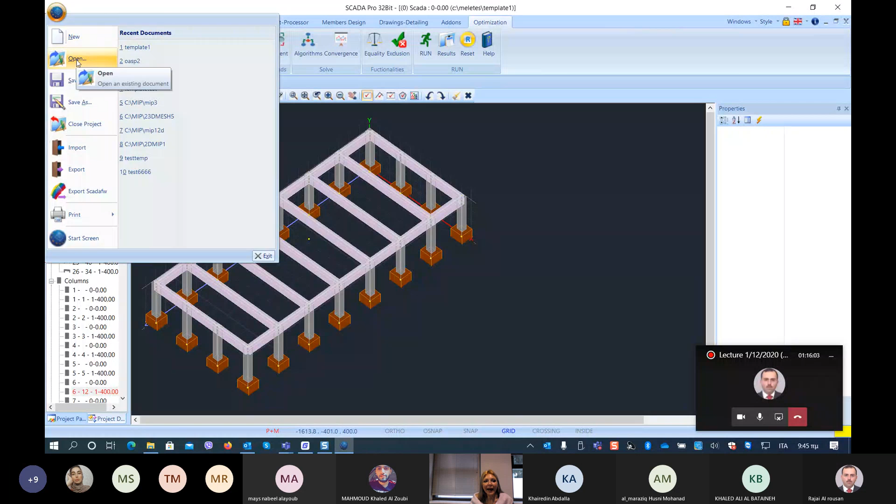So now if I close this, I save my project, okay? I keep it like I have it, and I open this project. Let me go in template 1, I go in OCP, run files, and I find the 035, if I could remember, and I click it. You see, here is the other project that is improved.

So this is the improved one, okay? And now I need to do the loads are inside, and what I need to do is to run again the analysis and to do the member designs in order to keep this one, okay? So this is how it works, also the optimization.

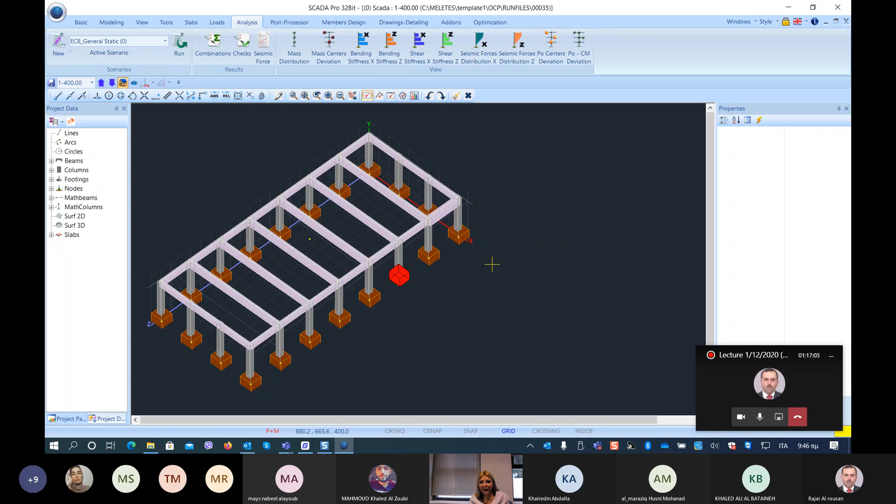So I believe it's done now. So please do your homework, do what you need, and I will be always here for you. Your professor will tell me what is the needs for now on. And I thank you so much for watching these lessons. I hope they were useful, and I'm here for you.